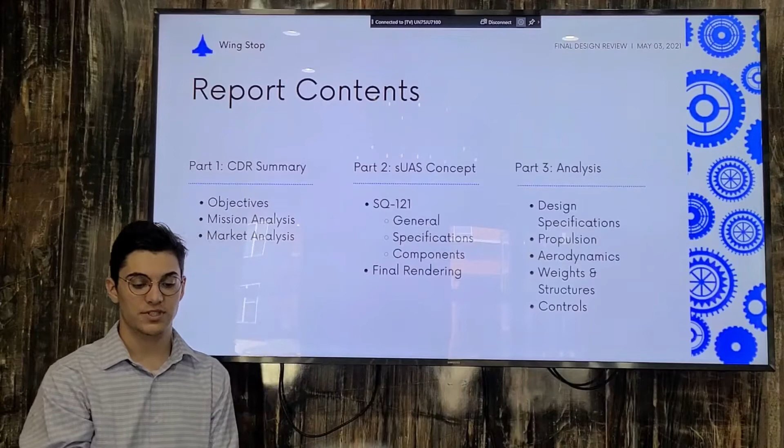So here's the contents of our report. Initially, I'm going to do a recap of our CDR, going over our objectives, mission, and market analysis. In part 2, we're going to look at the SQ-121, some of its general specifications, and the final rendering for the plane. And in part 3, I'm going to analyze the design specs, propulsion, aerodynamics, weight and structures, and controls.

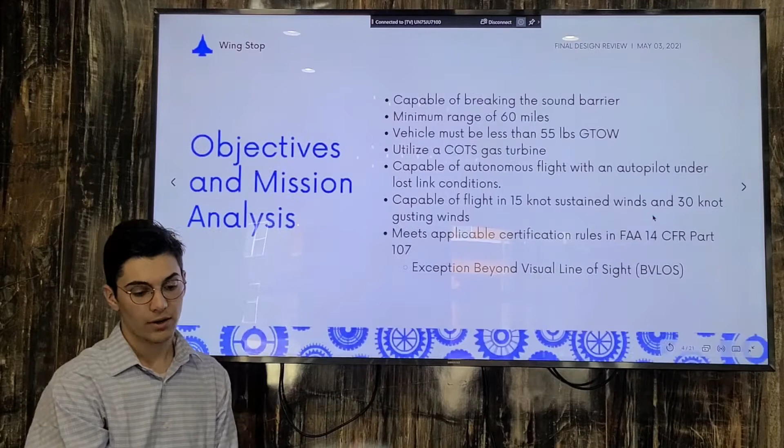So recapping CDR, our objectives and mission analysis are listed here. Some of our big ones are it needs to be able to break the sound barrier, have a range of 60 miles, weigh less than 55 pounds at gross takeoff weight, and utilize a commercial off-the-shelf gas turbine.

So off to my side here, you can see our concept design for the SQ-121. Some of its specs are a total length of 47.4 inches, a wing area of 468 square inches, and a wingspan of 40 inches, giving it an AR of 3.42.

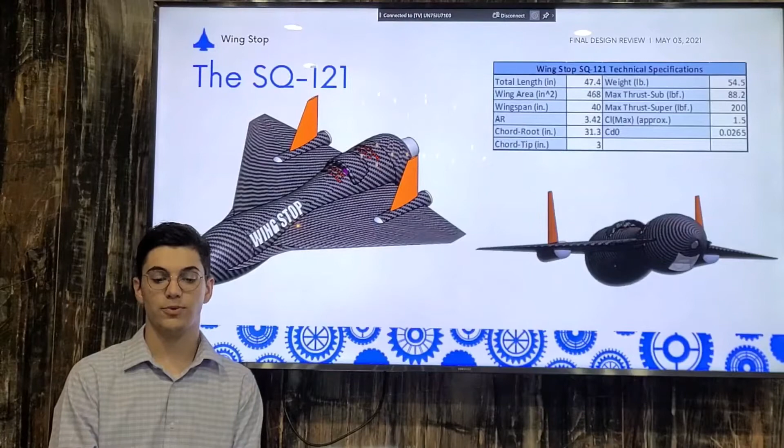Its GTOW is 54.5 pounds, and it has a max subsonic thrust of 88.2 pounds and a max supersonic thrust of 200 pounds. Its approximate C sub L is 1.5, and its CD naught is 0.0265.

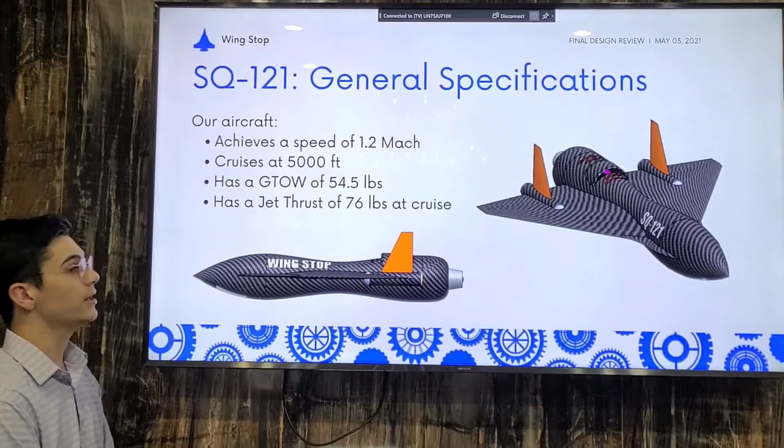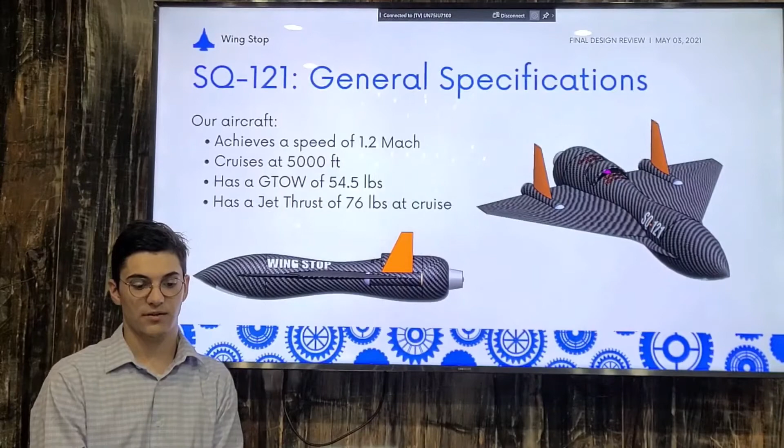Some other general specifications: it has a top speed of Mach 1.2, and it cruises at 5,000 feet to accommodate for its fairly small fuel tank. So if we have it fly too high, it's going to run out of fuel before it's able to reach the range we need. And it has a jet thrust of 76 pounds at 5,000 feet.

So the chosen motor for our SUAS was the AMT Titan. It's a gas turbine that weighs 11.5 pounds fully equipped. At sea level, it has a max thrust of 88.2 pound force, and it has a max consumption of 36 ounces a minute and a specific fuel consumption of 1.53 pounds per pound hour.

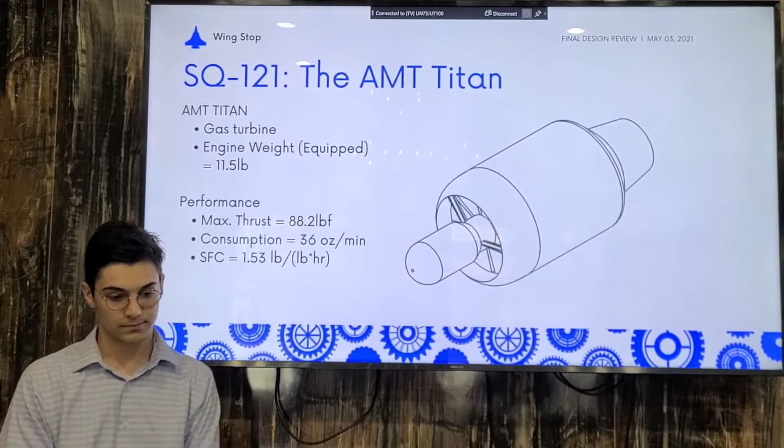The rocket motors to help propel our aircraft to Mach 1.2 are J135Ws. Each one weighs 2.5 pounds and provides 61.6 pounds of peak thrust, and has an average thrust of 35.3 pounds for a total burn time of 7 seconds.

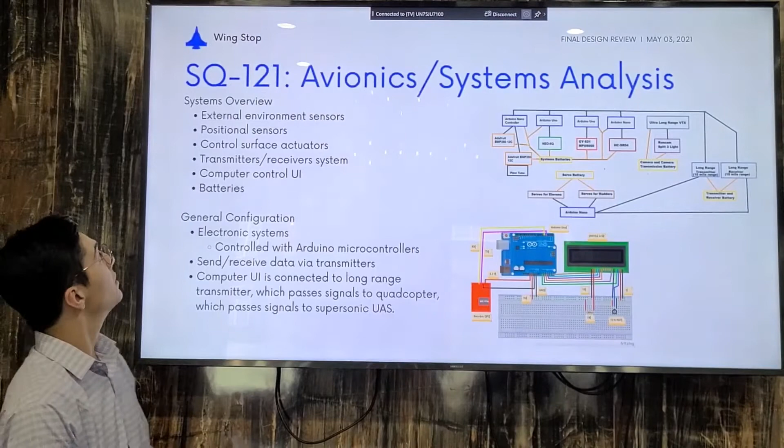Here's our avionics and systems analysis. Our system overview: we have external environmental sensors, positional sensors, control surface actuators, transmitters and receivers, a computer, control UI, and batteries. And then our general configuration is our electronic system, which is controlled with an Arduino microcontroller setup, and it sends and receives data via transmitters.

And our computer UI is connected to a long-range transmitter, which passes signals to a quadcopter, which passes the signals from there through a high-strength transmitter to the supersonic UAS.

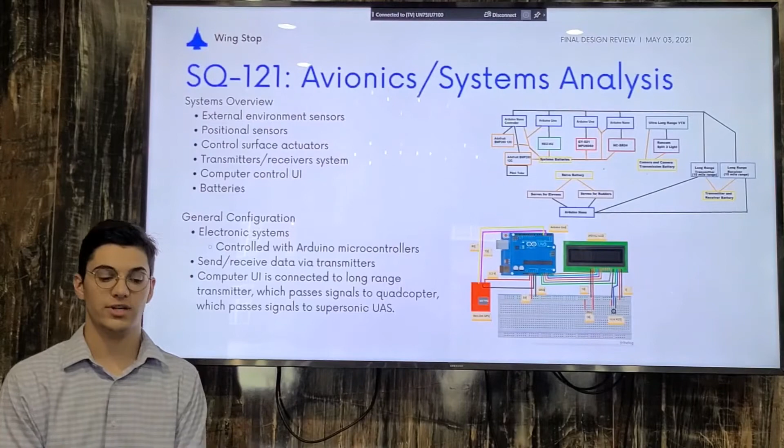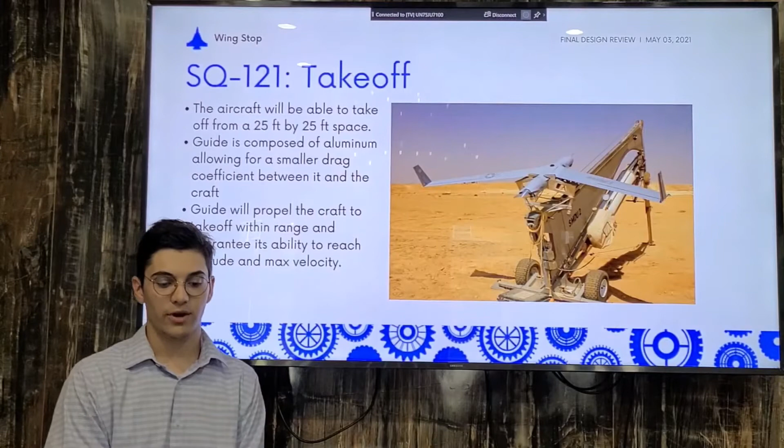For takeoff, we're going to use a rocket sled, like you can see here to the right. The aircraft has to be able to take off from a 25 by 25 foot space, so this system would allow for this.

For landing, we're just going to use a low-speed grass landing. As we prepare for landing, we're just going to lower our speed as much as possible and let it land on a soft patch of grass.

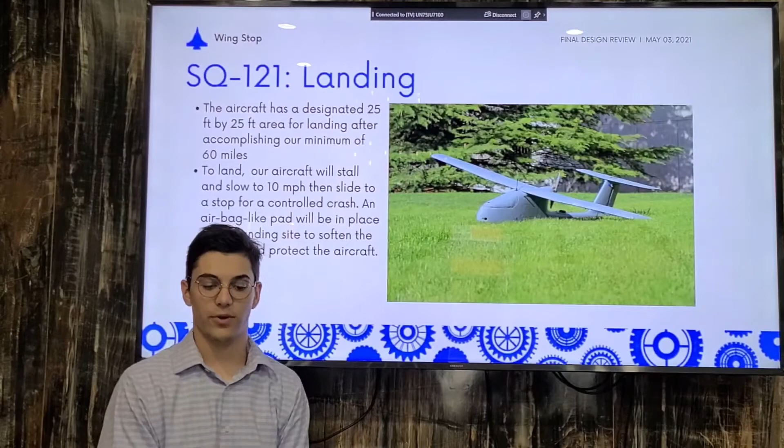So our SQ-121 is based off of the design of an SR-71, as you can probably tell. We chose our AMT turbine because it is the most likely to accommodate our propulsion options. It has a relatively low weight with a high thrust output, and our rocket and SR-71 with the turbine is a good setup to meet our COTS jet engine constraints.

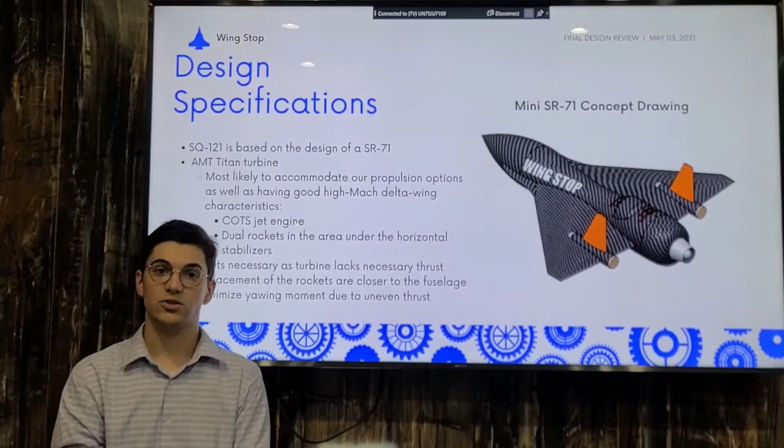Our dual rockets are placed in the area under the horizontal stabilizers and were necessary as the jet turbine does not make enough thrust and it also stalls out at Mach 0.8. The rockets are placed closer to the fuselage than on an SR-71 because solid propulsion rockets do not make a constant thrust output between units. So the further apart they are, the more moment they can cause. So we want to get those as close as possible to minimize that effect.

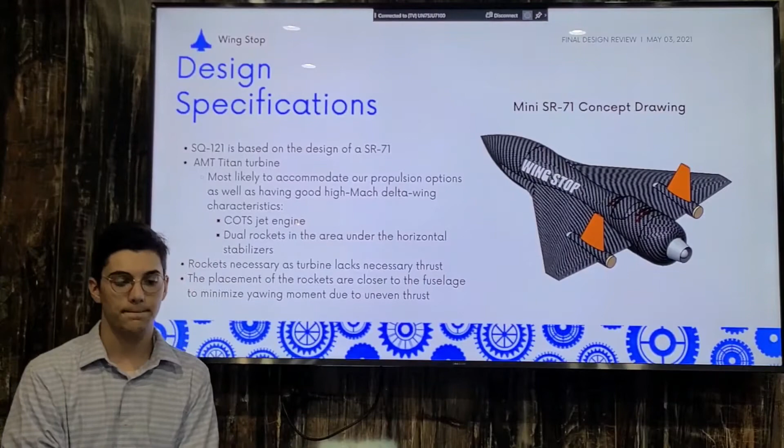So looking at our propulsion analysis, as I mentioned earlier, the Titan alone produces 88.2 pounds of thrust, but at our cruise altitude of 5,000 feet, only 76 pounds of thrust is produced. But in order to reach the supersonic design for UAS, we need about 180 pound force of thrust based on our drag polar here to meet our goals.

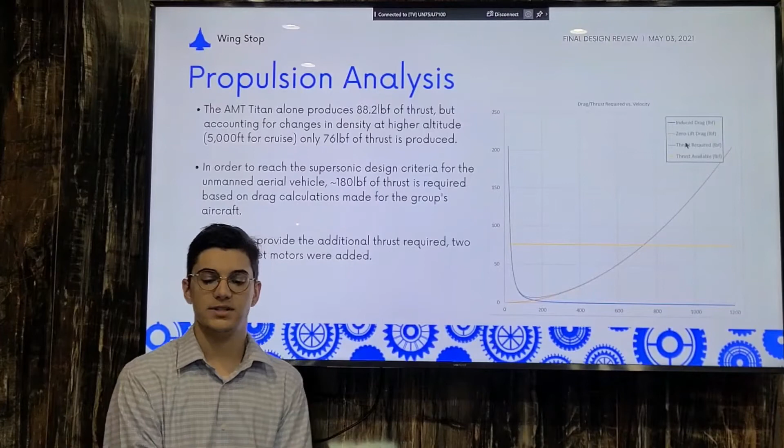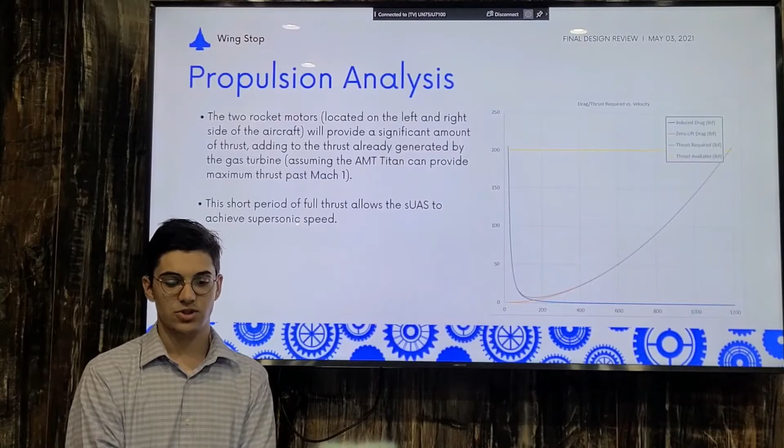So in order to do this, we needed to pick 2 model rocket motors in order to meet that criteria. So as you can see here in our new graph on the right, our thrust available has increased a lot to 200 pounds, and that is due to our 2 rockets located, one on the left and one on the right, and these produce a significant amount of thrust for about 7 seconds.

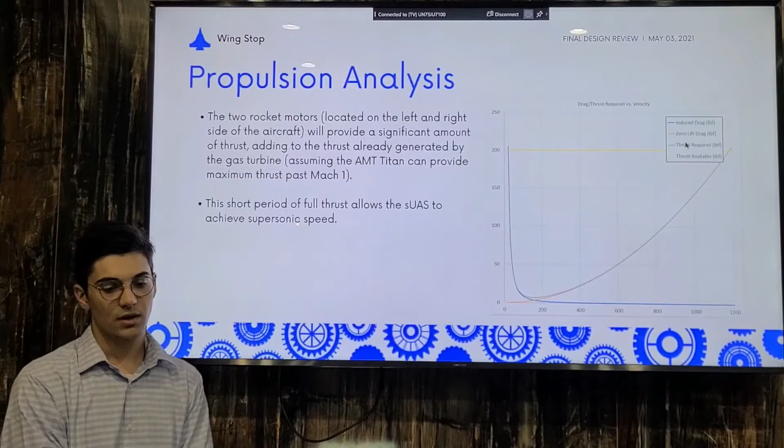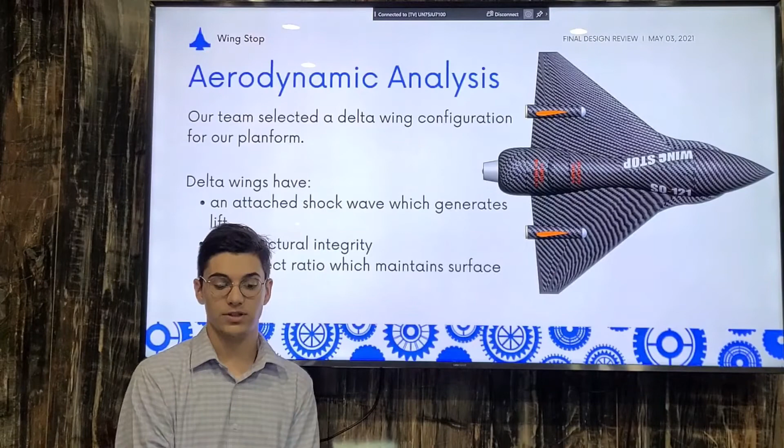For our aerodynamic analysis, our team selected a delta wing configuration for our planform. We chose a delta wing because they have an attached shockwave which generates lift, has high structural integrity, and a low aspect ratio which maintains the surface area.

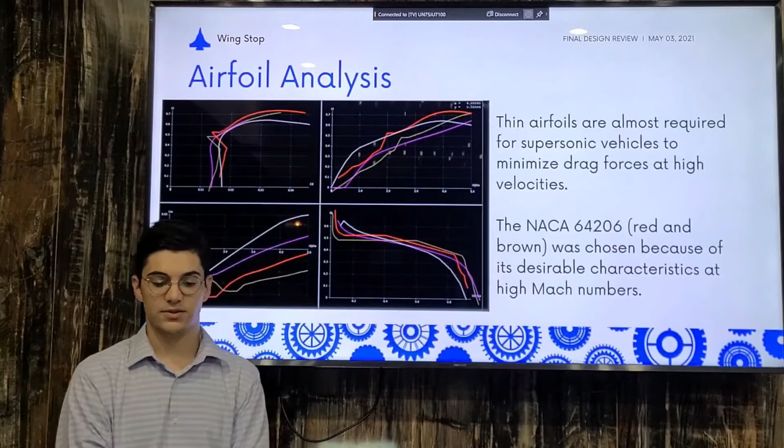Looking at our airfoil analysis, we chose thin airfoils, which are almost required for this supersonic vehicle to minimize the drag forces at high velocities. We chose the NACA 64206, the red and brown lines, because of their desirable characteristics at high Mach numbers.

At cruise altitude, our aircraft would be aiming to reach Mach 1.2. An estimation of the total drag on the airframe at this velocity would be about 95 pounds force, as you can see here on the graph to the right.

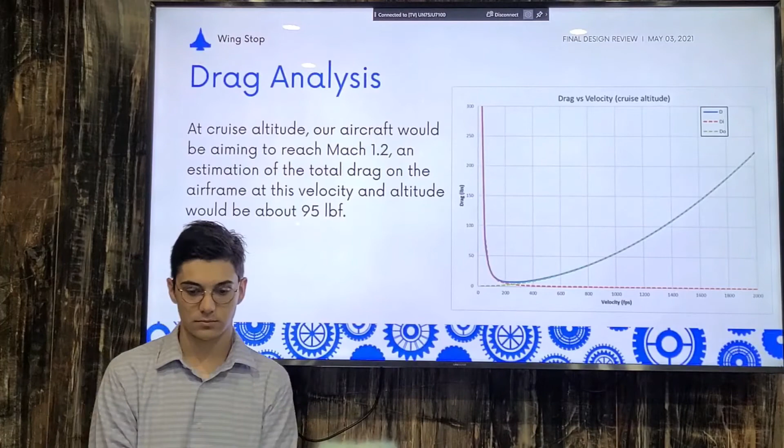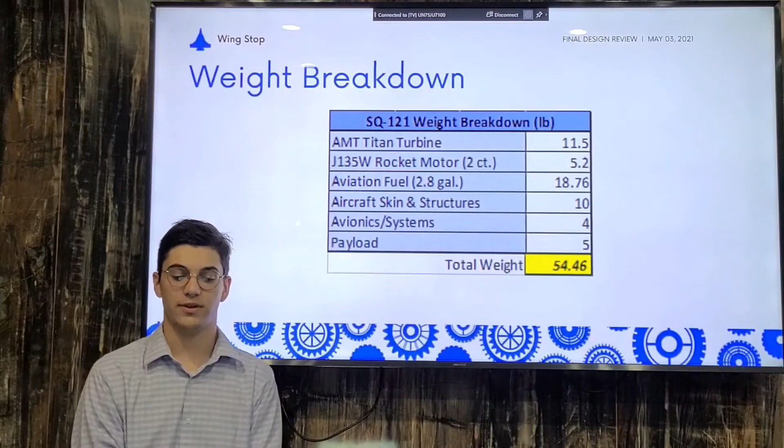So breaking down the weight, with the jet turbine weighing 11.5 pounds, our rockets weighing 5.2, us having about 19 pounds of fuel, the fuselage weighing about 10 pounds, having roughly 4 pounds of avionics and systems, and a 5-pound payload with cameras, we're looking at a total weight around 55 pounds.

So here's some pictures from our aircraft. Here's a close-up of the nose of our aircraft. Right here you can see a glass or a transparent window with our FLIR camera, and then behind here are going to be our antennae to send and receive radio signals from our quadcopter antenna.

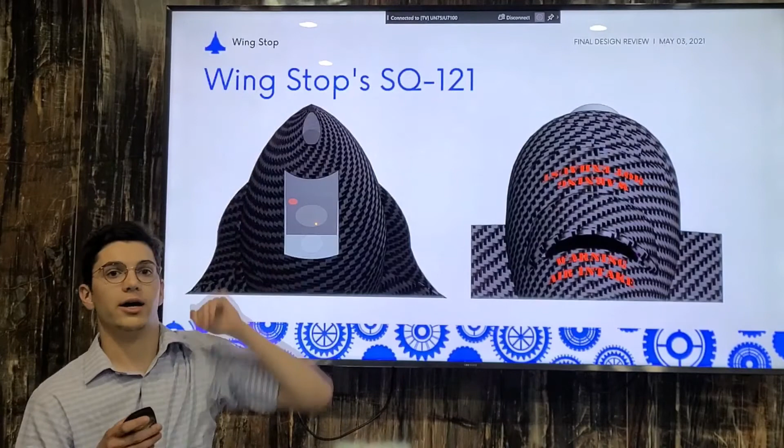I didn't touch on that earlier, but the reason we need a quadcopter is because antennae transmit and receive better at higher altitudes. So having an antenna low to the ground, like a ground station, is not going to be able to transmit as far as a high up one would be. So putting the transmitters and receivers on a tethered quadcopter would be able to cast a lot farther for those 26-mile radius needed to reach up to this aircraft.

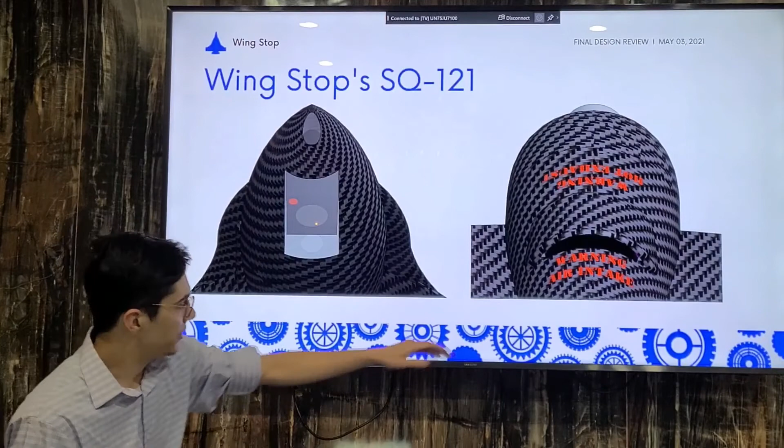We also have our little window here for our FLIR camera. Here at the back, we have an air intake warning and then a hot exhaust warning for the tail of the aircraft where the engine is.

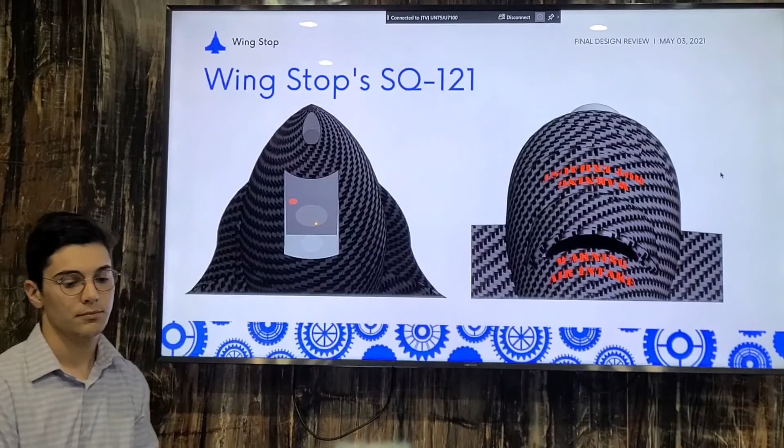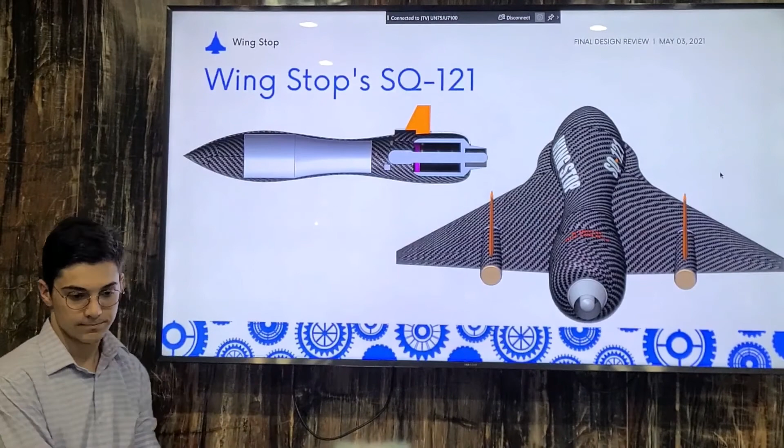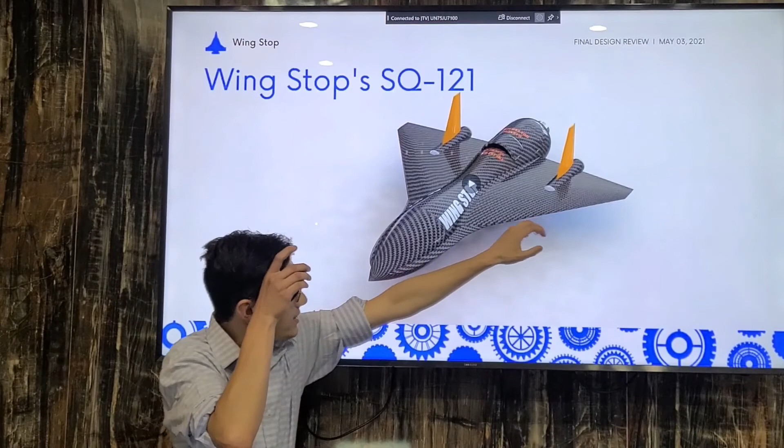And then this here is a video rendering of our aircraft. You can see that we tried to put some tapering in. Our computer modeling software had a little bit of an issue whenever we did that, but we put some tapering in, and we've area ruled the fuselage along the wingspan as it got wider in order to help with our drag. And we also added strakes here to help with drag as well.

And you can count on the SQ-121 spying on a country near you. Take care.